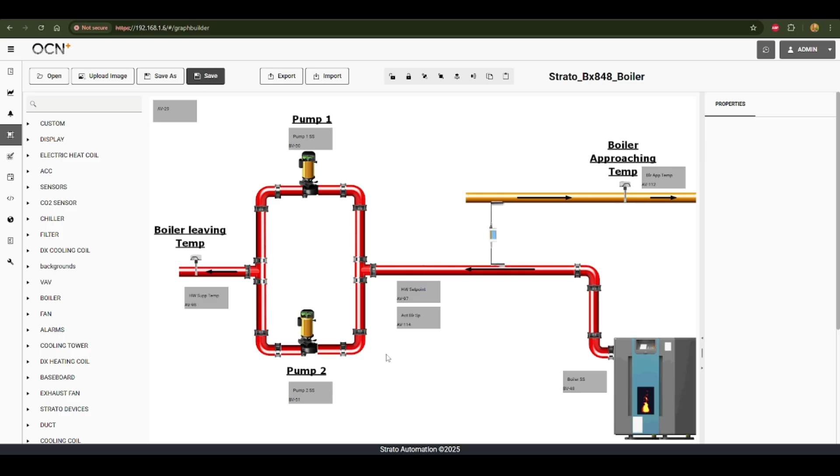If I select something like the boiler here, you'll see this is a default graphic. It's got some GIFs in there and some piping, as well as a bunch of display values that correspond to the boiler firmware.

If I open something like the OpenStat RTU, you'll see this has every possible combination of sensor and equipment that the OpenStat, specifically the rooftop unit firmware, supports.

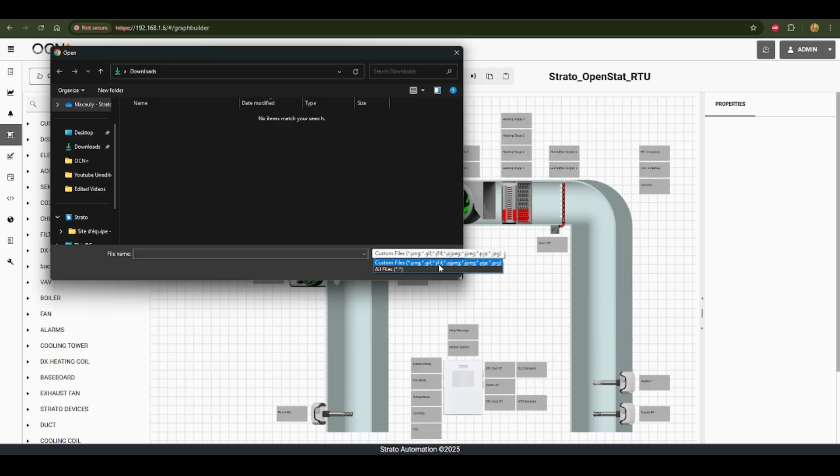If I want to upload custom things, that'll show up under this custom section here. If I hit upload image, I can upload any image from my computer, and you'll see all the file types like PNG, GIF, and so on.

So when I'm creating my graphic, let's say I've done a fully custom graphic and I want to save it. If I hit save as, I can give it a new name and description. As long as I'm not naming it the same as something previously named, I don't have to worry about overriding anything or losing any files.

Or if I want to save it under the existing name, I just hit save. One thing we do recommend is not saving over the default graphics just in case you need them. We recommend saving as a different name and leaving the default graphics alone, in case you want to use it as a template in the future or for other devices.

Additionally, once I'm done creating a graphic, I can hit export and save that locally to my machine, so it downloads the file to my computer. Then I can import it directly, so I can share graphics between servers or sites.

If I've spent some time and created a custom graphic, it might be valuable to save that and use it again on a similar application.

Along the top here, we have some organizational things for when you're actually building your graphic. We have lock and unlock features, so that things stay where they're supposed to, or you can move things around by unlocking them.

We have send to back and bring to front. This is how you organize things and get ductwork and equipment to layer properly in your graphic.

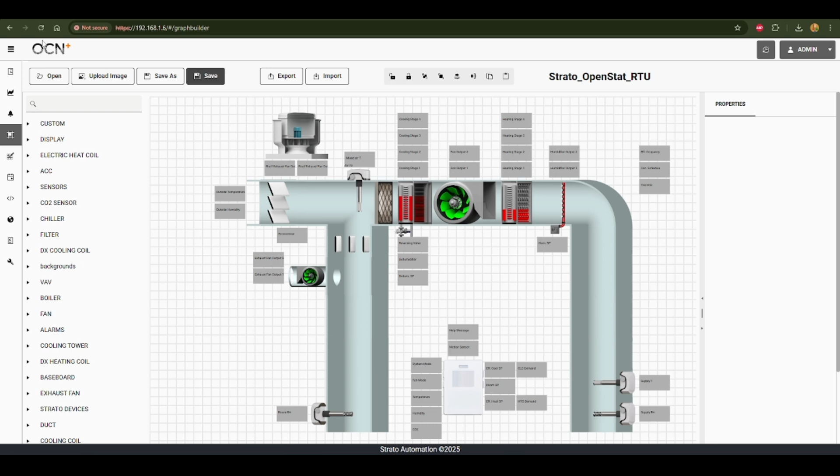Now that we know how to use all of these features and what we can do, let's open a graphic. Actually, we'll start from scratch, so if I just hit refresh, it will open a blank canvas.

So if I go to custom, let's drag out a floor plan here. Once I drag it out, the properties populate on the right-hand side, showing the X position, the Y position, and the scale of this image.

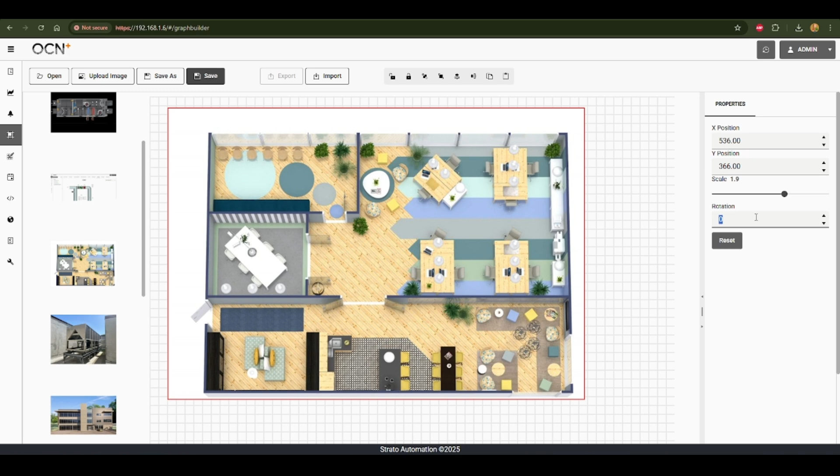If I want to scale it up, I'll drag it to the right and increase that. If I want to shrink it, I'll drag it to the left and scale it down. I can also rotate the image, so if I enter, say, 90 degrees here, it'll rotate it by 90 degrees.

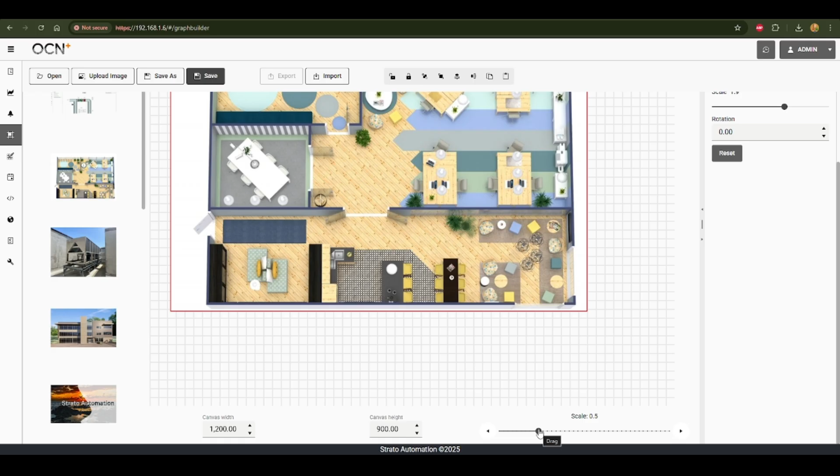And 0 is straight on. You can also edit things for the whole canvas size down here. So if I want to raise or lower the canvas size by height and width, I can do that, or I can edit the scale as well. You'll see this scales everything rather than individual items.

Let's say with this floor plan, I want to add display values. If I go under display here, I'll have a couple different options. Let's say I want to throw these medium display values on here. I have a display temperature here and a display temperature here. And then I'll have one master set point that I'll throw on here as well.

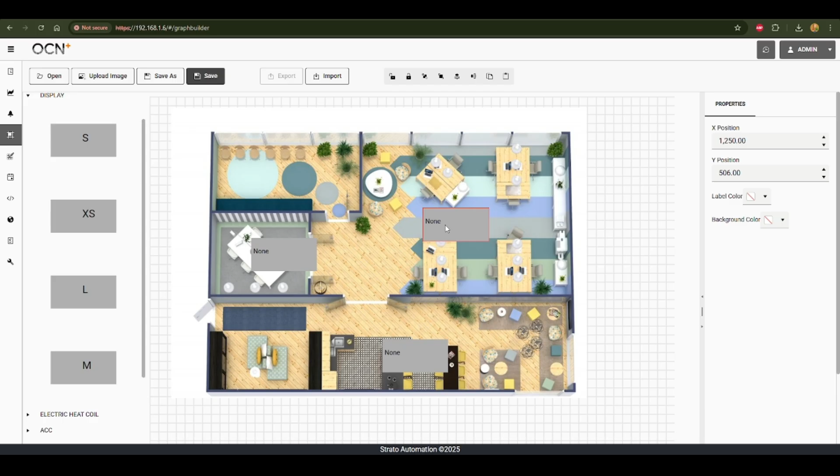Now that I've got my display values here, I have to tell it where to grab that data from. So we'll start up on this one here. If I right click on it, I get a bunch of different options: rename, read only, lock, and delete. This top one here, bind to display object, is where I can go in and tell it where to look for data. The way we do our default graphics is by these application aliases here.

You can see all these here are what we use to make templates, so it can be applied to our controllers without worrying about address or instance information. Whereas if I was going to do that for my graphics here, I would have to choose absolute or relative. Absolute takes into account the device instance, whereas relative takes into account which device I'm looking at.

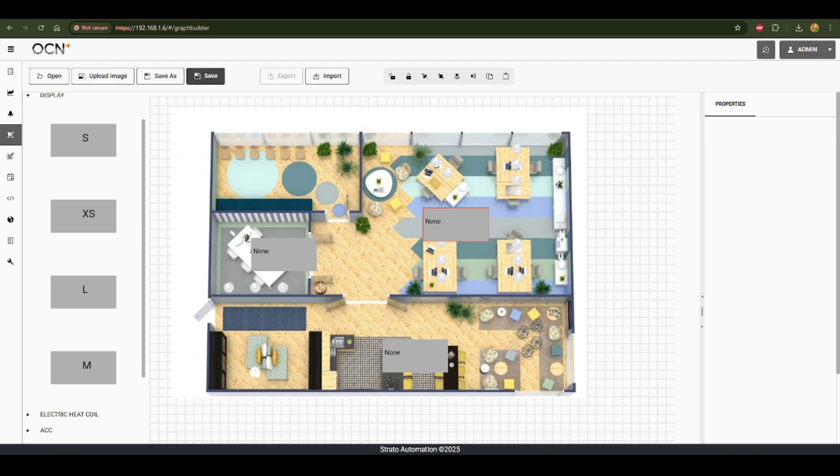So over here in systems, absolute wouldn't care what this value is here. It's going to be hard coded to whatever value I've set there. Whereas if I have this set to relative, it's going to say, okay, which device am I looking at in the tree? I'm going to use that instance, and look at that point for that controller based on that instance, rather than a specific point, an instance that's been preset here.

So for this one, I'll leave it on absolute. Let's say I want to look at my AVs for one of my devices, 213007. So let's say for this device here, this one will be my set point. Selected object 213007, AV1. Apply, and you'll see room temperature set point shows up there.

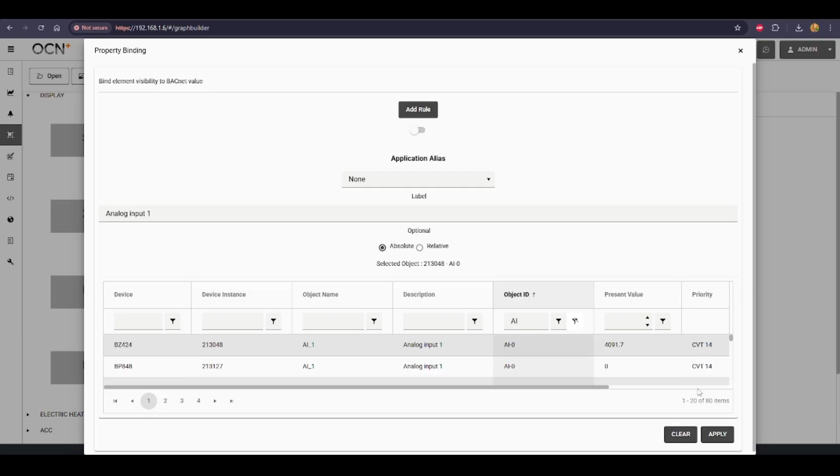Then let's say this one here is one of my analog inputs on that same device, and we'll grab this value here. And then on this one, we'll grab it from a different controller, an analog input, from that VAV there. So you'll see now I've got these values here.

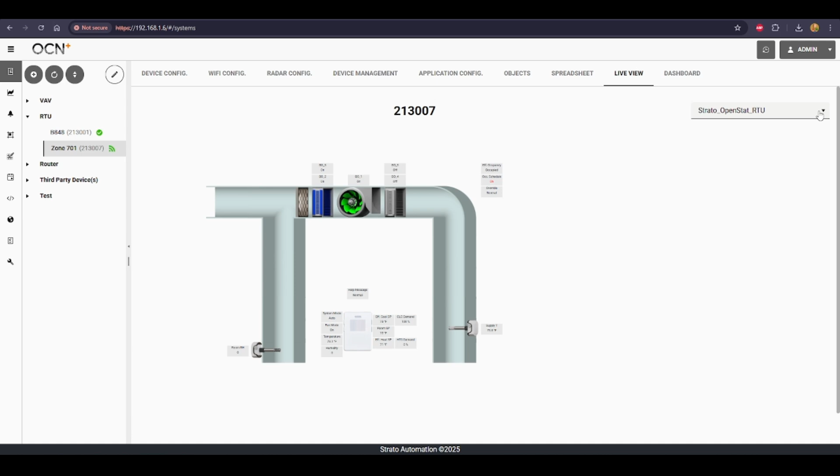Hit save as, I give it a name, call it demo. I don't have to give it a description if I don't want to. And if I go over to systems here, refresh it to make sure it updates, scroll up to find demo, there it is. You'll see I've got all those values that I plugged in earlier. Now obviously these values, that would be quite the temperature, but because I have them set up to be writable, I can click on them and interact with them just like I can any other point.

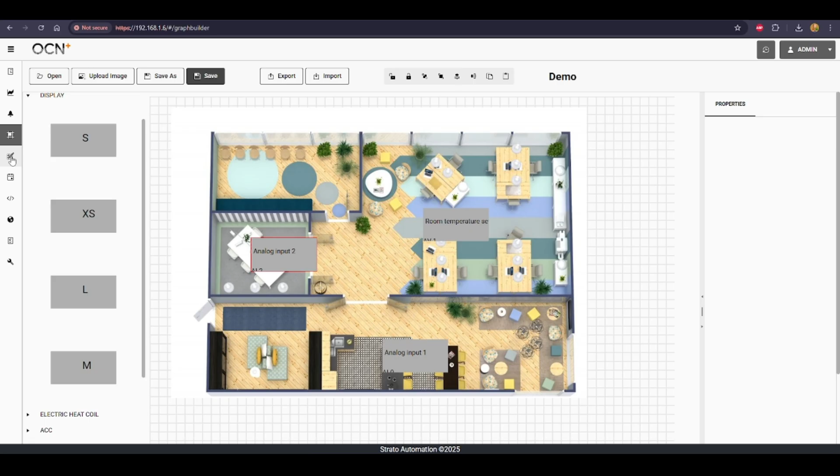Moving on from the graphic builder, we'll move on to dashboards. Here in my dashboard builder, on the left-hand side, I have all of my available widgets, and I'll talk through some of these in a minute. But across the top, I've got my project and file management stuff. I've got open—if I click this, I can open an existing dashboard that I've created. If I hit new, it'll give me a new dashboard to work on rather than the existing one I was looking at.

If I hit save as, that allows me to save the new dashboard template under a new name. I can also hit save here, and that'll save the existing file under this name rather than as a new file with a different name.

Then I've got copy and paste. Again, Control C and Control V work with this system here.

I've got import and export, so I can reuse dashboard templates between servers and sites. I can export this one to my PC and save it, and then I can import it from my PC as well. And then search and replace.

What this allows you to do is, if I am using a previously created dashboard template, the search and replace allows me to change things in kind of a batch edit form. So I can search for the device instance and bacnet object, and then replace it with a bacnet object and device from a different controller. That allows me to use dashboards between servers without having to go in and manually recreate it over and over again.

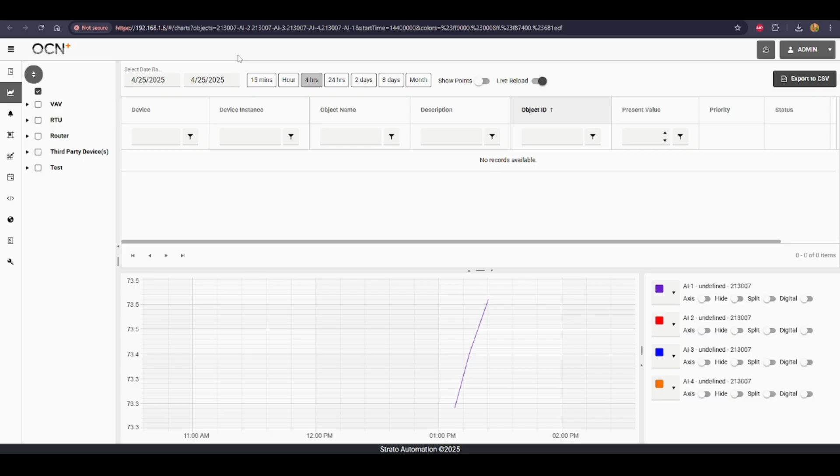So this is a great way to save trends to look at later, so you don't always have to go to the trend section and select all your points and controllers you want to look at. I could grab a couple key points, throw them on a chart in a dashboard, and then when I'm in the dashboard, I can right click on it and jump to the trend for those points I've selected.

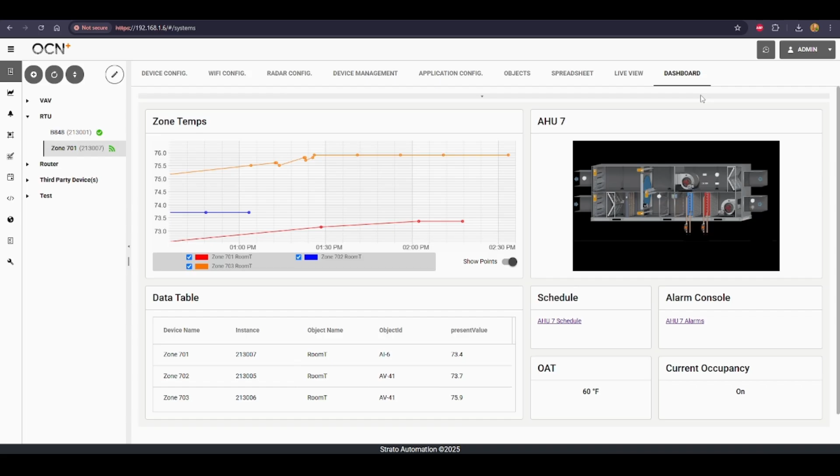So once I have all of my information in here that I'd like, got all my links and all the data I want to show, if I hit save as here, I'll give it a new name. We'll call this demo, save, dashboard saved. Now if I go to one of my controllers here or one of my sites, and hit that little drop down, I can select demo and you'll see that dashboard populate with all that data, just like I saw it in my dashboard builder.